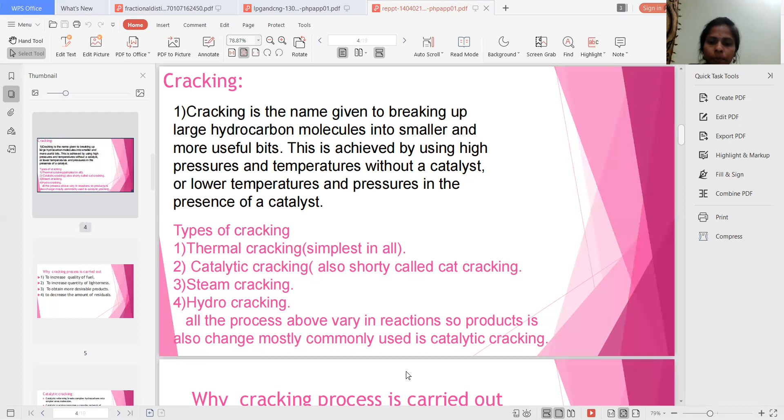But why is the cracking process carried out? What is the major reason to follow the cracking method? Before that, we have already synthesized and separated the individual fractions in the refining of petroleum process. But why prefer catalytic cracking? Let us see the main reasons to carry out the catalytic cracking process.

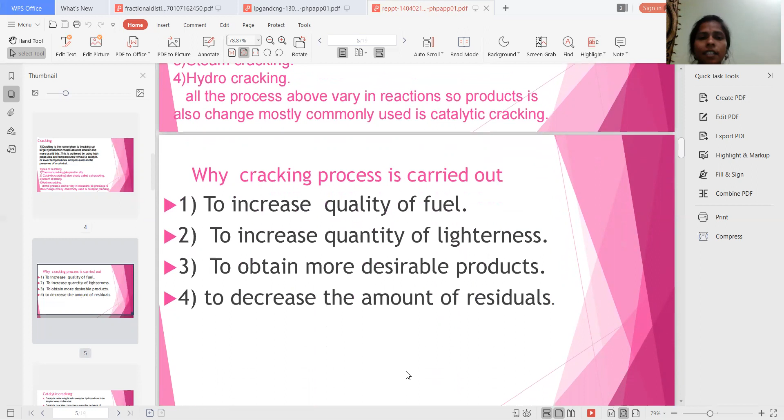The main aim is to increase the quality of fuel. The quality of fuel is higher in the catalytic cracking process, and also to increase the quantity, meaning the good yield. To obtain more desirable products, and to decrease the amount of residuals. Residual is nothing but the waste products.

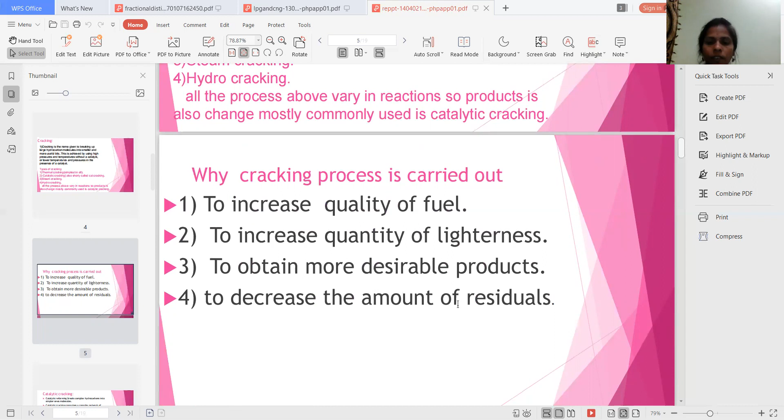To decrease the residuals also, we use the catalytic cracking method. So these are the four important aims in the catalytic cracking process: to increase the quality, to increase the quantity, to decrease the residuals, and to get more desirable products. This is the main aim of catalytic cracking.

Catalytic cracking is a reforming process that breaks complex hydrocarbons into simpler molecules. That is what is named catalytic cracking or cracking. So in the cracking process, higher hydrocarbons are broken into lower hydrocarbons.

Catalytic cracking comprises a complex network of reactions, both intramolecular and intermolecular. It has a complex network and is a big process, applicable both for intramolecular and intermolecular reactions. Intermolecular is between two different molecules, and intramolecular is within the same molecule.

Use of a catalyst in the cracking reaction increases the yield of improved quality under much less severe operating conditions than in thermal cracking. In thermal cracking, the process is very lengthy, whereas in catalytic cracking we get more yield. Yield is nothing but the quantity of the compound produced.

Not only yield, we will get good quality of the compound compared to thermal cracking. So we are having some drawbacks in thermal cracking. What are the drawbacks? This is a lengthy process and we are not getting the good quality and good quantity like catalytic cracking.

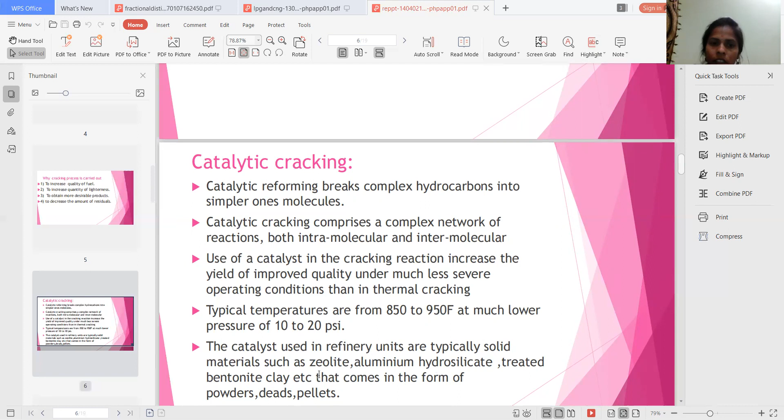And here the catalyst is especially in the solid state. So this is catalytic cracking here.

Now let us see the cracking of petroleum, that is cracking of lubricating oil. Our aim is getting the gasoline or synthetic petrol by using the lubricating oil. That is the main aim of moving bed catalytic cracking. But first, let us see what is the cracking of petroleum.

Cracking of petroleum hydrocarbons was originally done by thermal cracking, which has been almost completely replaced by catalytic cracking because it produces more gasoline with a higher octane rating. So thermal cracking is not giving the yield like catalytic cracking. We are replacing thermal cracking with catalytic cracking to get the high quantity of the compound.

But both methods are almost similar, except in thermal cracking we maintain higher temperature and higher pressure, whereas in catalytic cracking we use lower temperature and lower pressure in the presence of catalyst. And the main thing is we must get more yield and good quality of the compound.

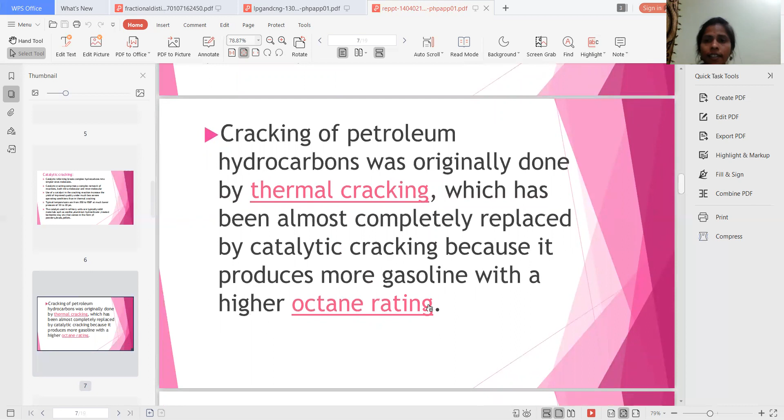So what we are synthesizing is gasoline. Gasoline is also called synthetic petrol. We are synthesizing petrol by using moving bed catalytic cracking.

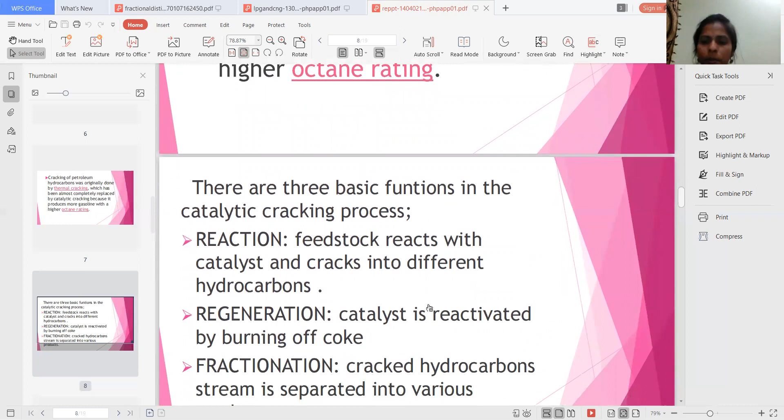Here we have three basic functions in the catalytic cracking process. Those three functions are reaction, regeneration, and fractionation. These three basic steps are involved in every catalytic cracking process, whether it is moving bed catalytic cracking or fixed bed catalytic cracking.

In the reaction process, the feedstock reacts with catalyst and cracks into different hydrocarbons, as I explained in offline classes. We use two different chambers: one chamber heats the lubricating oil, and in another chamber we heat the reactant, that is the catalyst. These are the basic reactions taking place in the reaction step - feedstock reacts with the catalyst and cracks into different hydrocarbons.

Initially, the crude oil, that is the lubricating oil, and the catalyst are heated in individual chambers, and this vapor is sent to the reactor. In the reactor, reaction takes place, and from this reactor we get vapors. These vapors are sent to the fractional distillation chamber.

The next one is regeneration. Catalyst is reactivated by burning off coke. So again, we can reactivate the catalyst by burning the coke. That means this is the regeneration process of the catalyst.

And the last one is fractionation. Through the reactor we get vapors, and these vapors are sent to the fractional distillation chamber. In the fractional distillation chamber, fractionation takes place according to boiling point, like the refining of petroleum. So cracked hydrocarbons stream is separated into various products - that is called fractional distillation or fractionation. Here we get individual oils according to boiling point.

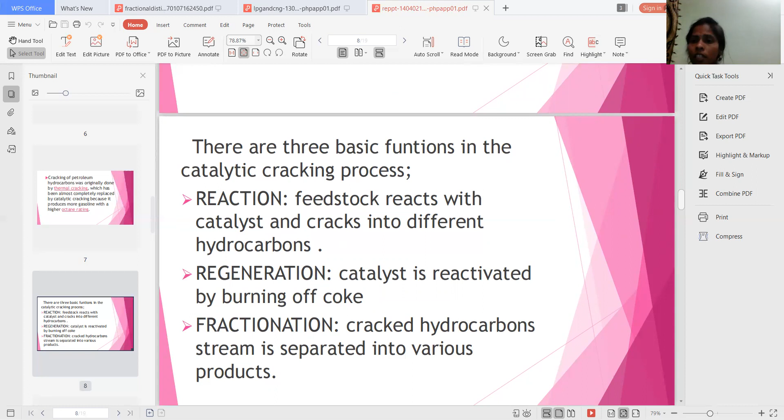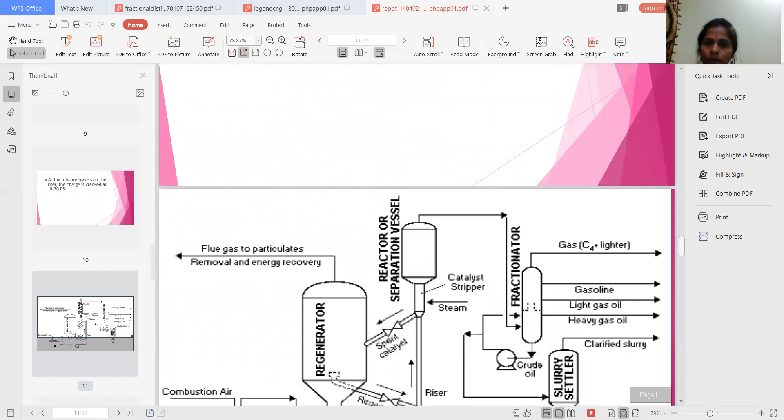So these are the fluid catalytic cracking. But now I'm going to explain the moving bed catalytic cracking. See, here we are having something like this - this is the fractional distillation chamber, reaction, and the regenerator. All these equipments are present in the fractional distillation process.

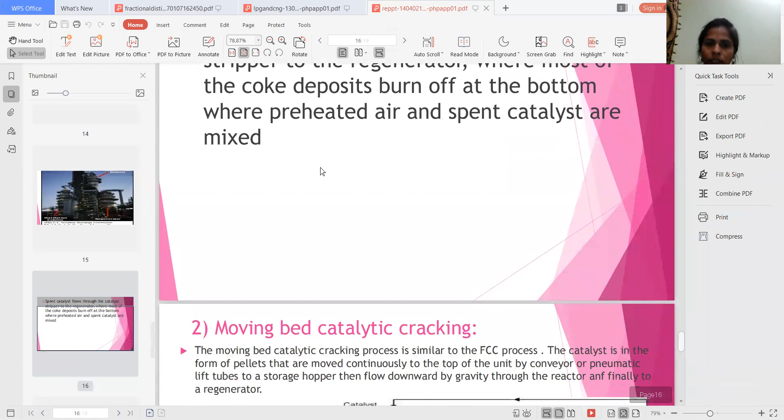So this is the process which we have in the syllabus. Initially the lubricating oil is heated in the preheater. This is the catalytic hopper, the catalyst hopper. In offline session I explained the catalytic chamber separately, but in place of chamber, we are having the hopper here. In the catalyst hopper, catalyst is heating, and in the lubricating oil heater, lubricating oil is heating. The oil vapors and the catalyst vapors are sent to the reactor.

When these are sent to the reactor, they are heated at 500 degrees centigrade temperature. Now this mixture of the catalyst vapor and the lubricating oil vapors are reacting with each other to produce vapors, and now these vapors are sent to the fractionator.

In the fractionator, we get the individual oils, the individual fractions, like our fractional distillation chamber. Here we get one of the oils, that is the gasoline. So we are sending only the gasoline vapors to the condenser. In the condenser, the vapors are converted to liquid. Finally, this liquid is collected, that is the gasoline.

But in our offline session, I have drawn two more chambers. One is the cooler, and another one is the stabilizer. Finally, in the stabilizer, we separate the remaining impurities and get the pure gasoline in good quality and good quantity. That is moving bed catalytic cracking.

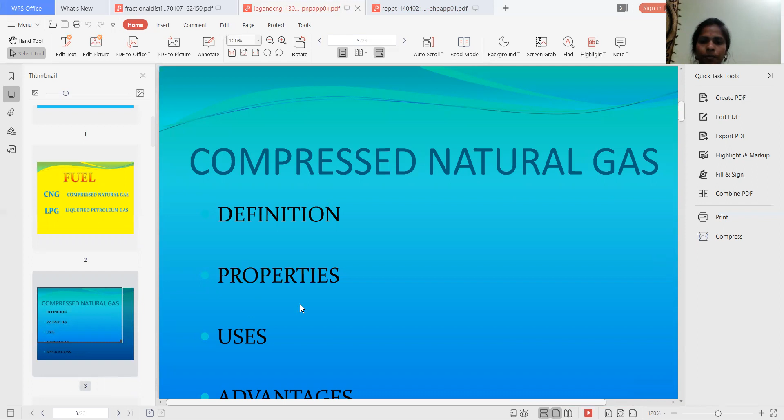Compressed natural gas. When the natural gas is compressed, it is called compressed natural gas. The primary component present in CNG is methane, that means the main component present in CNG is methane. So CNG is also called methane gas because it exists in the major content in CNG. It is mainly derived from natural gas.

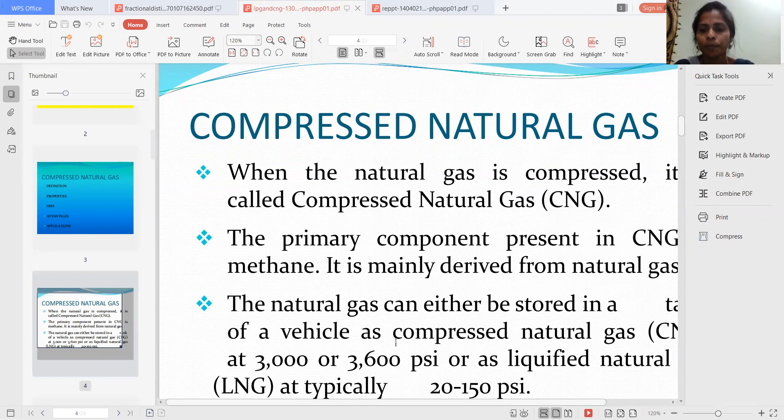By compressing the natural gas, we are getting CNG, and the natural gas can either be stored in a tank of a vehicle as compressed natural gas at 3000 or 3600 psi, or as liquefied natural gas typically at 20 to 150 psi. So this is the pressure range in the cylinders, that is compressed natural gas.

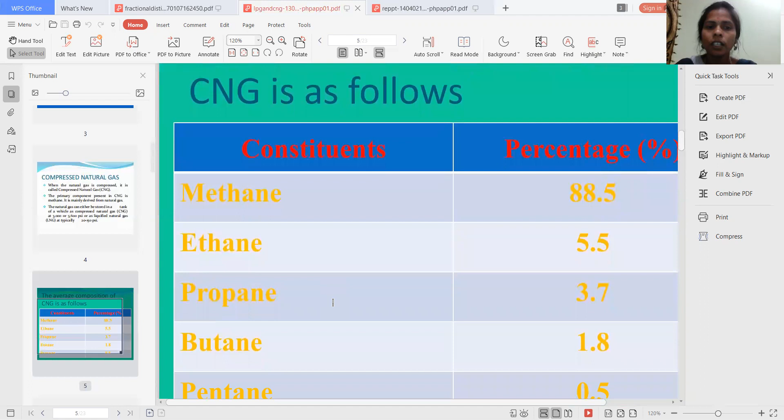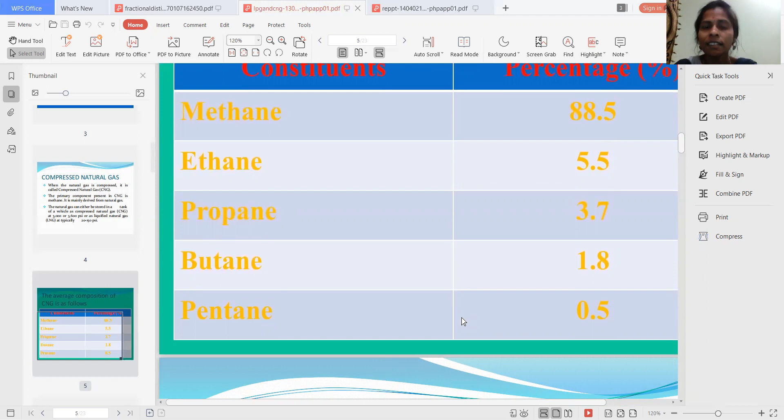This is the average composition of all these elements in CNG. It majorly contains methane. Along with methane it also contains ethane, propane, butane, and pentane. Methane exists around 88.5%, ethane around 5.5%, propane 3.7%, butane 1.8%, and pentane 0.5%. These are the individual fractions present in methane gas, also called CNG. But in CNG, methane exists around 88.5%.

How is CNG synthesized? CNG is synthesized by compressing the natural gas, that means by applying pressure on the natural gas you can synthesize CNG, reducing it to less than the volume it occupies at standard atmospheric pressure. It is stored and distributed in hard containers at a pressure of 200 to 248 bar. Bar is the unit of pressure, usually cylinder or spherical shape. So we are storing CNG in cylinders at this pressure, 200 to 248 bar.

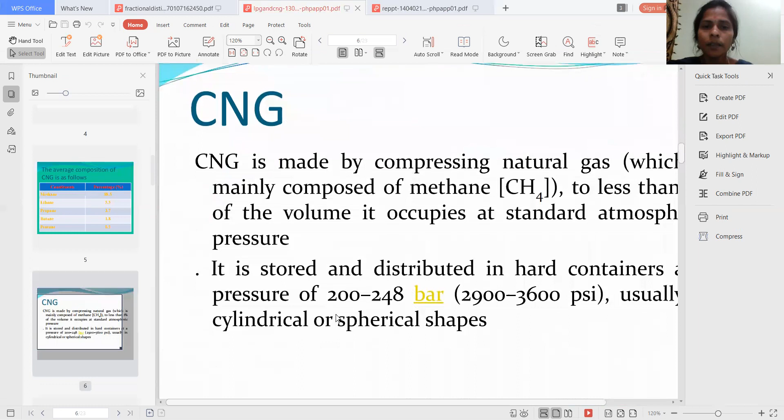Let us see the properties and applications of CNG. CNG is one of the cheapest, cleanest, and environmentally friendly alternative fuels. Nowadays in automobiles and autos we are using CNG as fuel. It is replacing diesel and petrol nowadays. Vehicles powered by CNG produce less carbon monoxide and hydrocarbon emissions. It is less expensive than petrol and diesel. The ignition temperature of CNG is around 550 degrees centigrade. These are the properties of CNG.

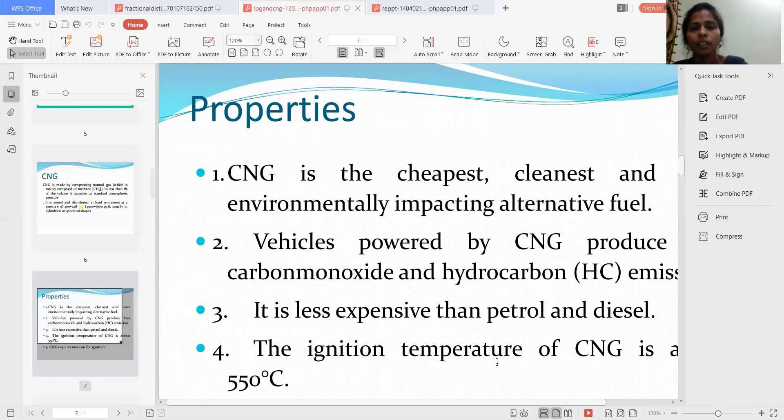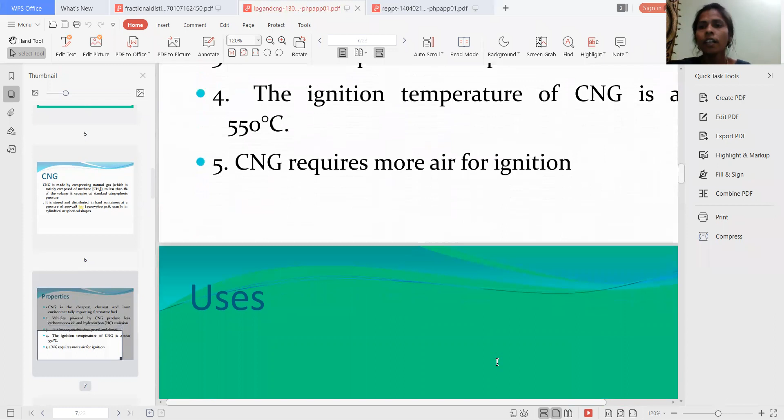Especially CNG is less harmful than the remaining fuels. CNG requires more air for ignition — this is the only drawback of CNG. It requires more amount of air for combustion or ignition.

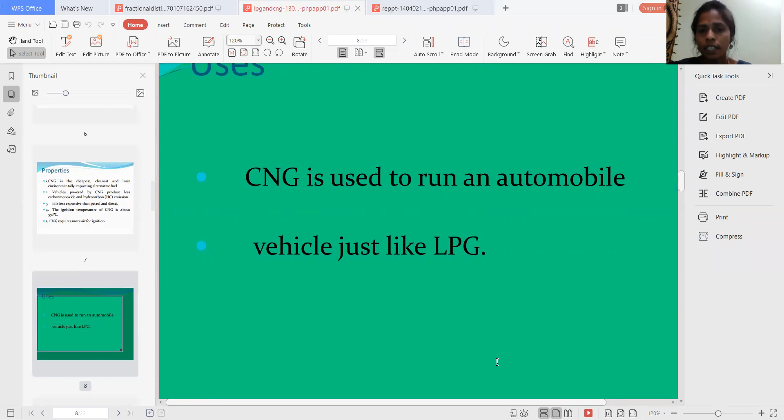Uses of CNG: it is used to run automobiles and vehicles, just like LPG. Advantages of CNG over LPG: CNG produces less pollutants than LPG, and CNG is cheaper and cleaner than LPG.

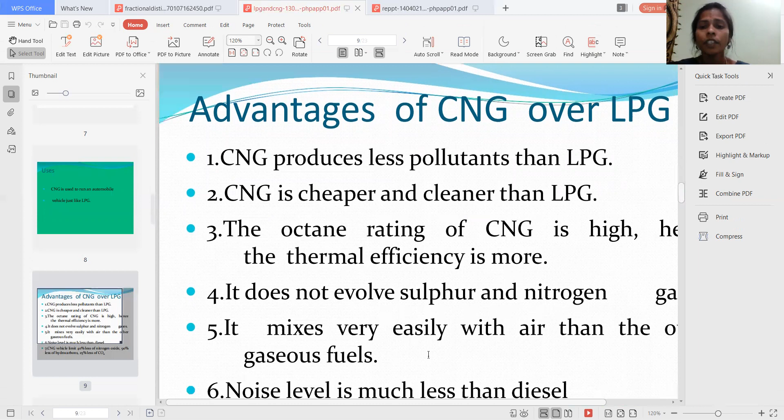The octane rating of CNG is high, so thermal efficiency is more. It does not evolve sulfur and nitrogen gas. It mixes very easily with air compared to other gaseous fuels. Noise level is much less than diesel. CNG vehicles emit 40% less nitrogen oxide, 90% less hydrocarbons, and 25% less carbon monoxide and carbon dioxide.

So these are the advantages over LPG. CNG produces less pollutants than LPG. It is not harmful, not releasing more pollutants into the environment. CNG is cheaper and cleaner than LPG, and because it's clean, it releases less pollutants. CNG is also very cheap compared to diesel, petrol, and LPG.

We will see what octane rating means in the next classes.

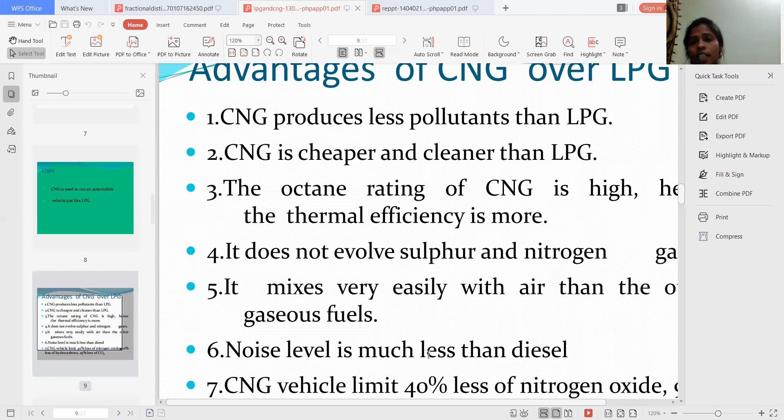The octane rating of CNG is high, so thermal efficiency is more. It does not evolve sulfur and nitrogen gas, unlike other gaseous fuels which pollute the environment by releasing these gases. CNG mixes very easily with air, unlike the remaining gaseous fuels which do not mix well with air. And the noise level is very, very less than diesel.

CNG vehicles have 40% less nitrogen oxide, 90% less hydrocarbons, and 25% less carbon dioxide.

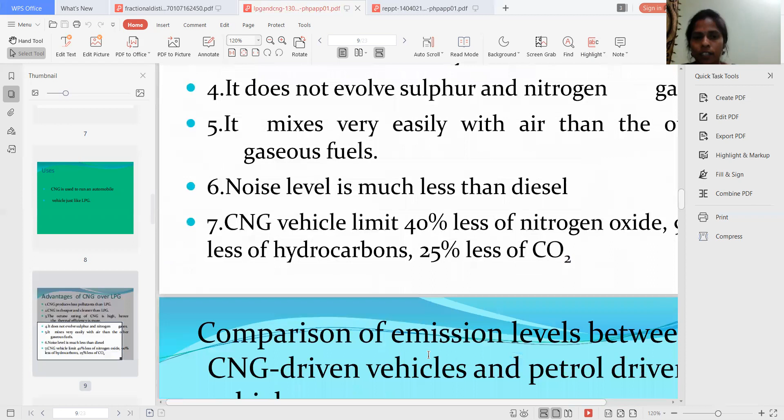Let us see the comparison between petrol driving vehicles and CNG driving vehicles, especially for hydrocarbons and carbon monoxide released from internal combustion engines.

In petrol driven vehicles, we get around 0.92 grams of carbon monoxide per kilometer, whereas CNG driven vehicles release around 0.05 grams per kilometer. Hydrocarbons from petrol driven vehicles are around 0.36 grams per kilometer, whereas CNG driven vehicles release around 0.24 grams per kilometer. So compared to petrol, CNG releases less pollutants in the environment.

So CNG is preferable to petrol.

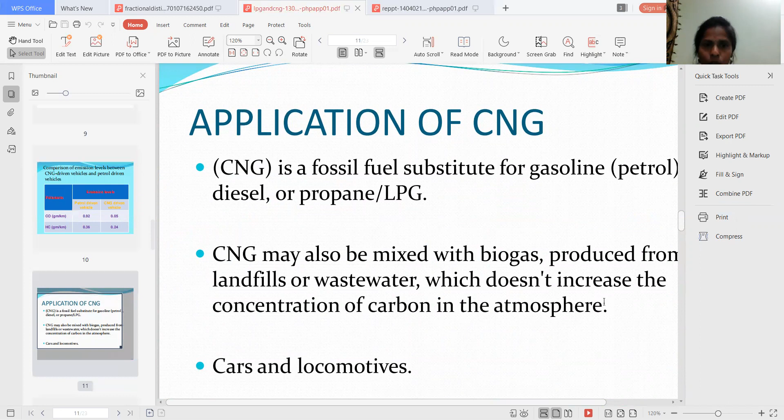Now applications of CNG. CNG is a fossil fuel, a substitute for gasoline, diesel, or propane - propane gas is also called LPG. CNG may also be mixed with biogas produced from landfills or wastewater, which does not increase the concentration of carbon in the atmosphere.

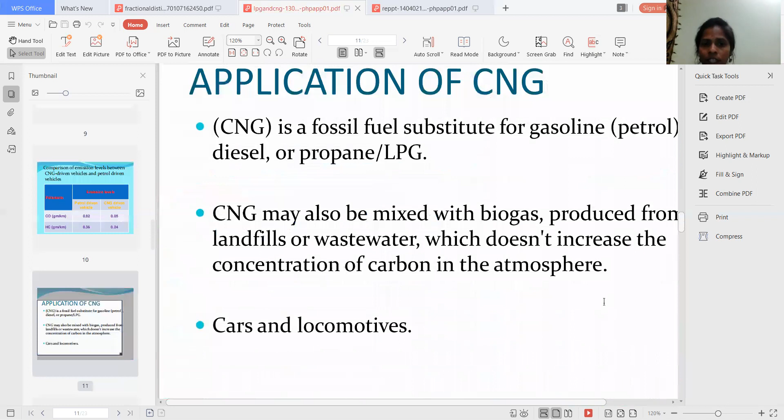Cars and locomotives - yes, in these also we are using CNG. These are the main applications of CNG.

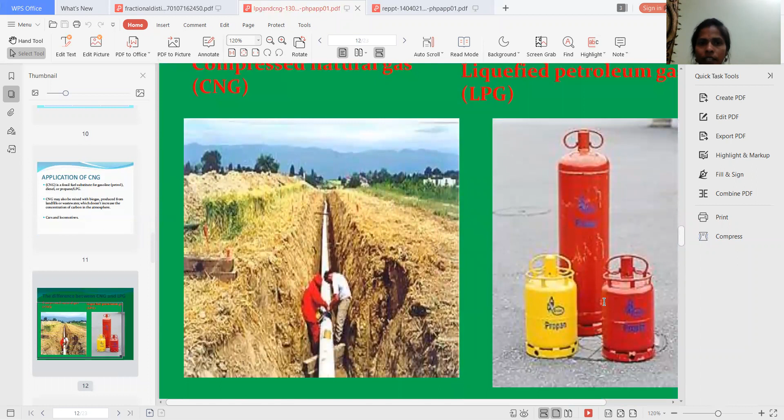Now let us see the differences between CNG and LPG. We know LPG is stored in cylinders, whereas CNG, which we get from the earth's crust as natural gas, is also stored in pipes.

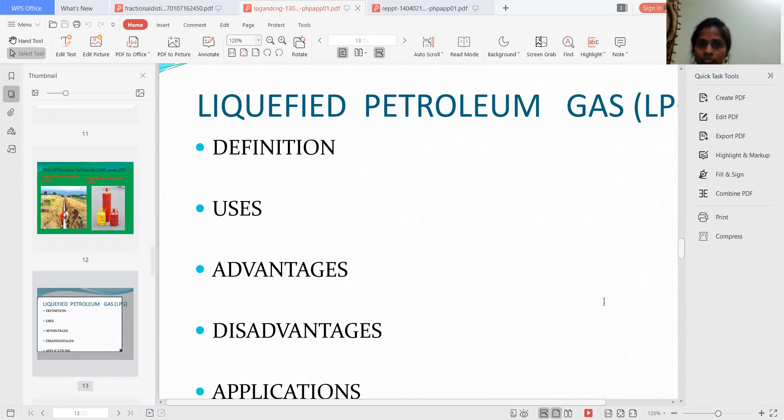And the last topic is liquefied petroleum gas. It is also one of the gaseous fuels, obtained from natural gas. LPG full form is liquefied petroleum gas or liquid petroleum gas. It is obtained as a byproduct during fractional distillation of crude petroleum oil or by cracking of heavy oil.

We have seen these two topics in the previous class - fractional distillation. In fractional distillation, through the outlet we get uncondensed gases; those are LPG and CNG. Not only in fractional distillation, but even in the cracking process we also get uncondensed gases, one of which is LPG. So we get LPG from both the fractional distillation process and the cracking process as a byproduct.

It consists of propane and butane, especially having propane and butane as the major content. It can be readily liquefied under pressure - that means if we apply more pressure on LPG, it easily converts to the liquid state. So you can also call it liquefied pressurized gas, which is nothing but converting to liquid by applying pressure.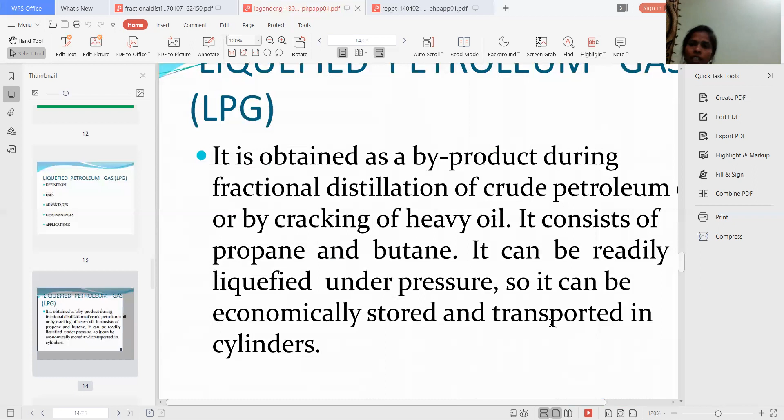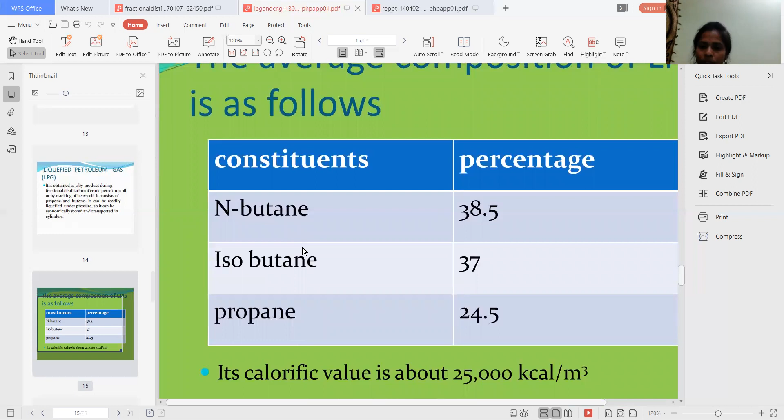The average composition of LPG especially contains N-butane, isobutane, and propane. N-butane exists around 38.5%, isobutane around 37%, and propane around 24.5%. These are the individual fractions or percentages of these hydrocarbons in LPG. Its calorific value is around 25,000 kilocalorie per meter cube.

Varieties of LPG bought and sold include mixtures that are primarily propane and primarily butane, and most commonly mixes including both propane, butane, and isobutane depending on the season. But especially in the cylinder we have either propane or butane. Sometimes propane, butane, and isobutane mix with each other, and this mixture is also stored in the cylinder and acts as LPG. This variation depends on the season, so based on the season we can change the composition of the LPG cylinders.

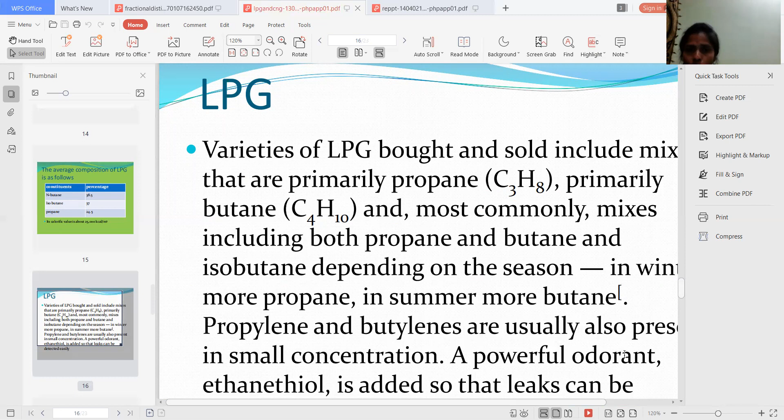In winter, more propane. In summer, more butane. So especially in winter we are using the propane mode, whereas in summer we are using butane mode. Propylene and butylene are usually also present in small concentrations in the LPG.

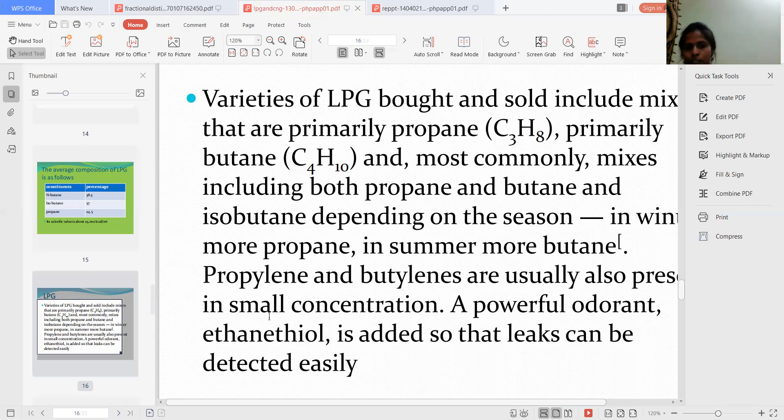A powerful odorant, ethane thiol, is added so that leaks can be detected easily. Generally, methane, propane, and butane do not have any smell, but for identifying leakage we add a chemical, and that chemical is ethane thiol. By adding ethane thiol, we can recognize and identify whether leakage is there or not, since it has a more pungent smell. This acts as the odorant in the LPG, but all the remaining hydrocarbons present in LPG are odorless.

Now let us see the uses. It is used as a domestic and industrial fuel, and also as a motor vehicle fuel. We know the applications of LPG, especially in domestic purposes like in the kitchen. But nowadays we are using CNG and LPG in autos instead of petrol, to release a lesser amount of pollutants.

Now let us see the advantages of LPG over other gaseous fuels. LPG consists of hydrocarbons, so it burns cleanly without leaving any residue or byproduct. LPG has a higher calorific value than other gaseous fuels containing hydrogen or carbon monoxide. Its calorific value is 7 times higher than coal gas and 3 times higher than natural gas.

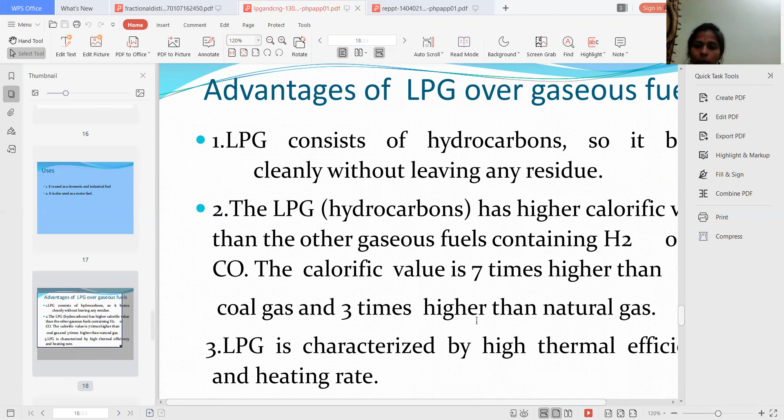If its calorific value is more, it is the best quality. Calorific value is nothing but the amount of heat energy released. So here it has more calorific value, 7 times more than coal gas and 3 times more than natural gas. LPG is characterized by high thermal efficiency and heating rate. These are the advantages of LPG, and it is easy to manipulate.

Comparatively, it is less of a health hazard, except in case of leakage, meaning if there is any leakage it is very, very harmful, but otherwise it is not harmful health-wise. It needs little care for maintenance, meaning we must just take care of leakage. It is free from carbon monoxide, so it is less hazardous, meaning carbon monoxide is not released from LPG.

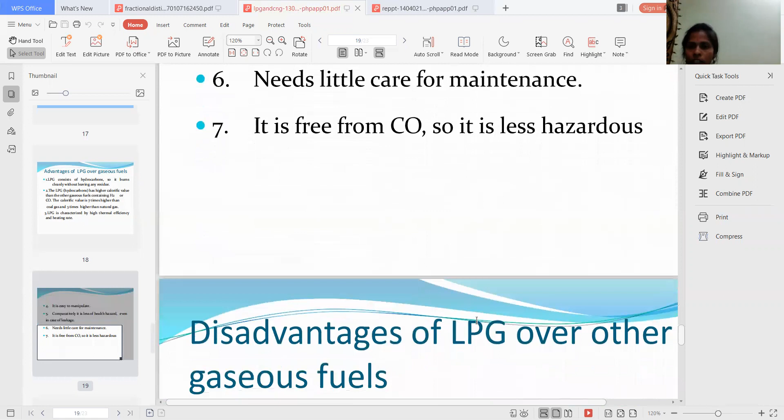Now let us see the disadvantages of LPG over other gaseous fuels. Due to its faint odor, leakage cannot be easily detected. Its octane value is low, while remaining octane values are higher. Handling must be done under high pressure only. LPG is suitable only for engines working under high compression ratio; if the compression ratio is higher, then only can we use LPG in internal combustion engines.

Otherwise, we can't use LPG in place of diesel and petrol in other vehicles. That means LPG use depends on the compression ratio; based on the compression ratio only can we use LPG in vehicles.

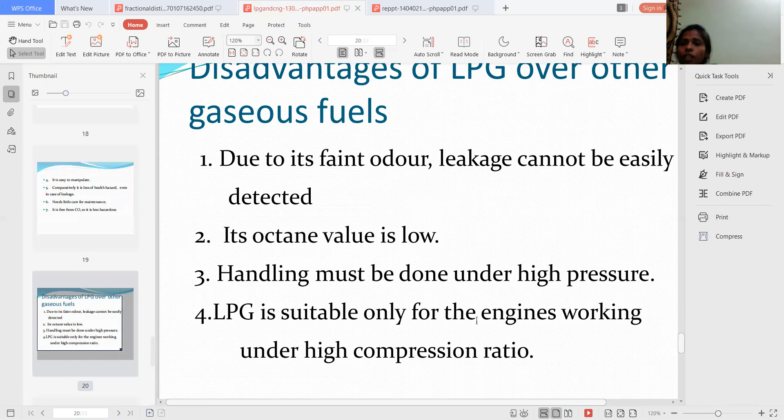Next, applications of LPG: it is increasingly used as an aerosol propellant and as a refrigerant, replacing chlorofluorocarbons in the effort to reduce damage to the ozone layer. So we are using LPG also in refrigerants. Previously we used chlorofluorocarbons, but these are very harmful and deplete the ozone layer, meaning they decompose the ozone layer. Due to that, we get ozone layer depletion, and there are various drawbacks of ozone layer depletion that you can see in EVS, the fourth unit.

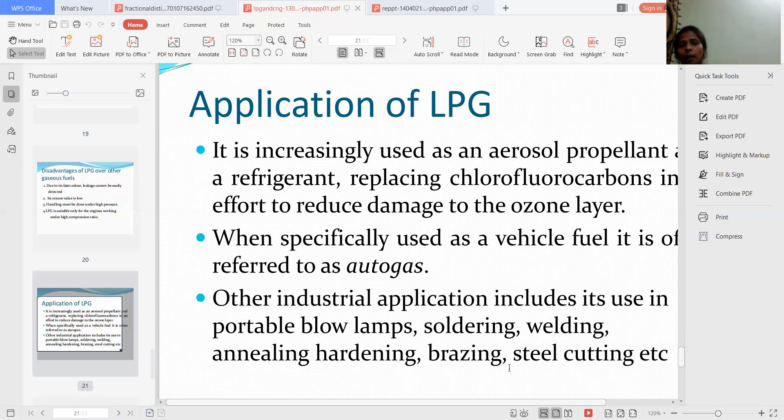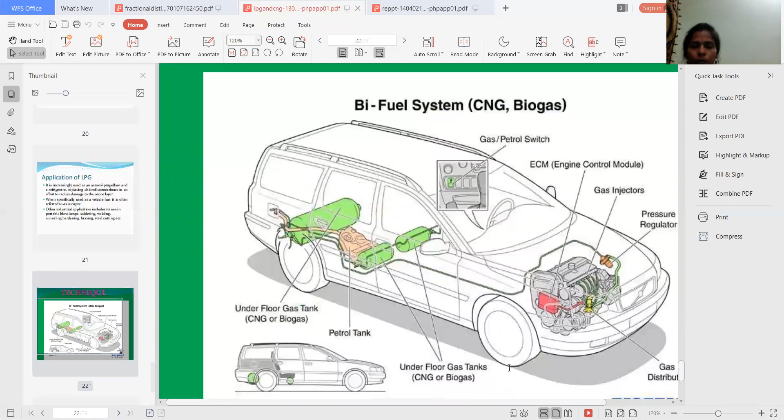Yes, so this we are using in vehicles, and based on this it is running.